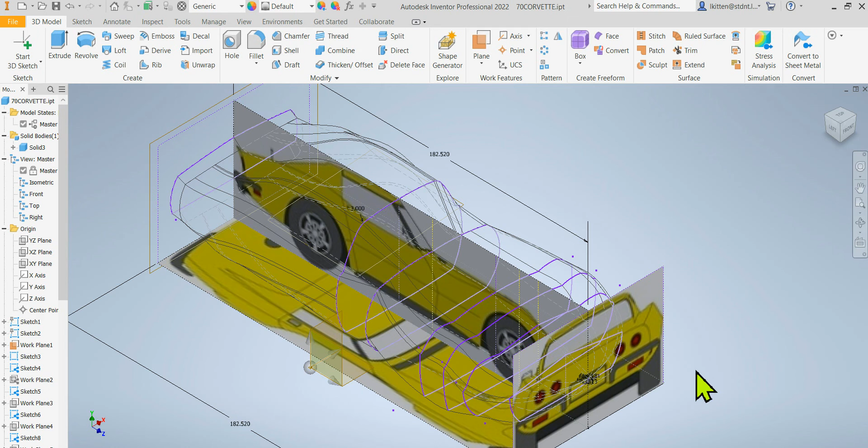All right, hopefully you're nearly finished designing your car. A couple things you probably noticed when you try to do your standard turning on it - it doesn't work very good because all these center points for the curves you add might be all over the place like mine are. It doesn't necessarily turn very well.

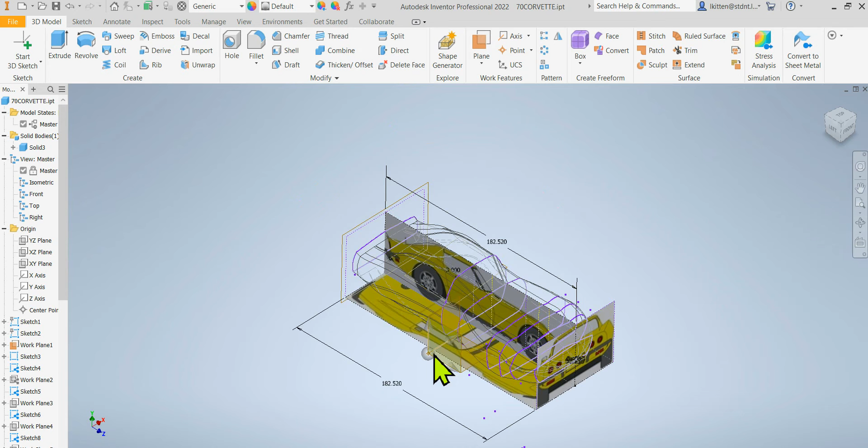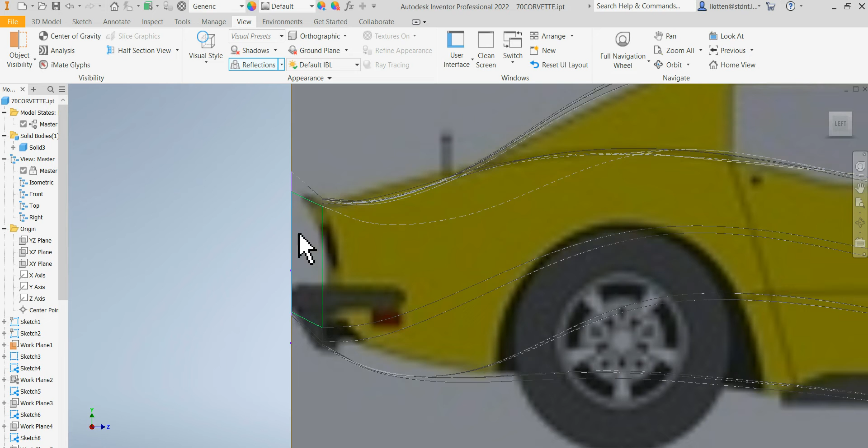I have mine in view with visual style wireframe with hidden edges right now just so I could see everything, and I turned all my sketches on. One thing I had to do a lot was go in and tweak the sketches so they more matched the shape of the vehicle, to get it to actually line up pretty well. I did have to add a few guidelines - some of them worked, some of them didn't, but some helped out, especially like mine for the top where this line is off the door to the back.

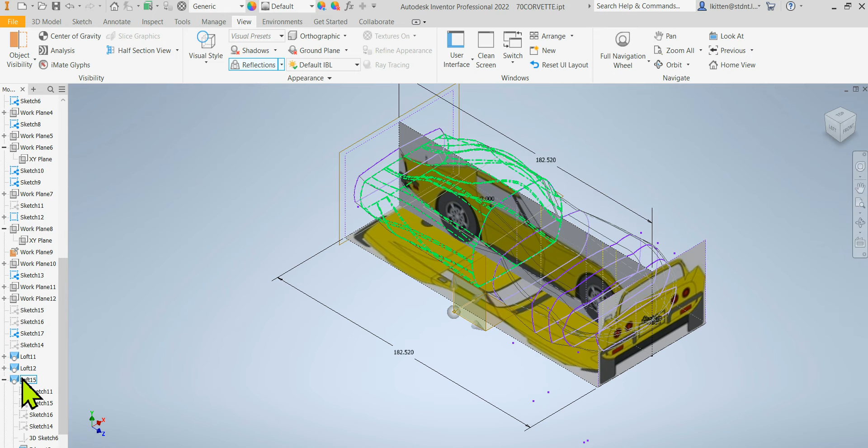So if you have to add some guidelines, it's not too bad to do. For instance, like Loft 15, I did all that. This one from the front to the back, I've got 4 lofts going on - to the windshield, the back, and then the air scoop on the back.

There's a 3D sketch right here that I had to add a guide to, because it was just making the lines go straight down instead of where I wanted them. So I added a 3D sketch right along that edge and just picked those points on my sketches as I went. Of course, you have to turn all those sketches on to be able to pick them, so make sure you make them all visible.

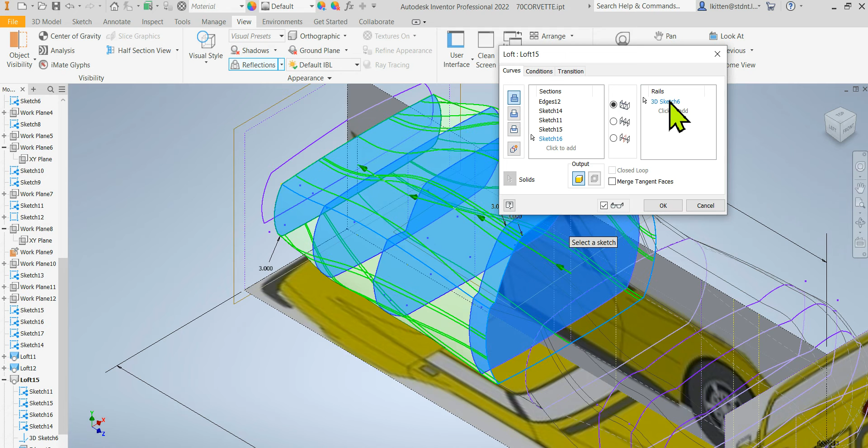When you add a 3D guide to it, I had to delete the loft and then add that into it, as you can see here. I showed you that a little bit last class too. There's a 3D sketch, the rail they call it in this item - that's that 3D line I gave.

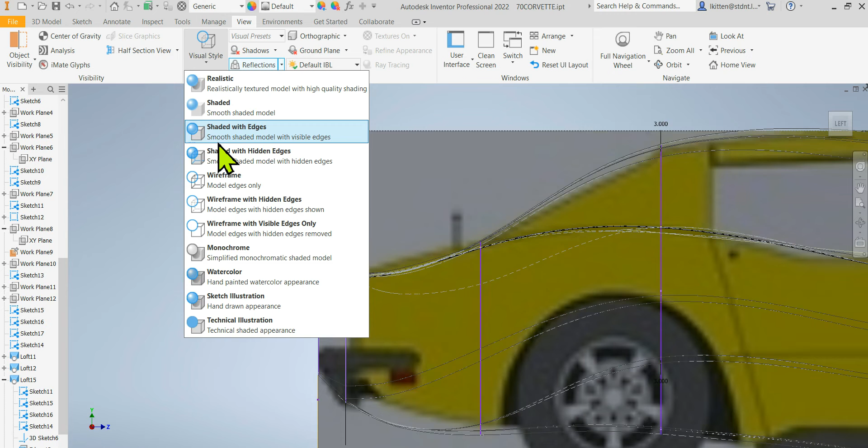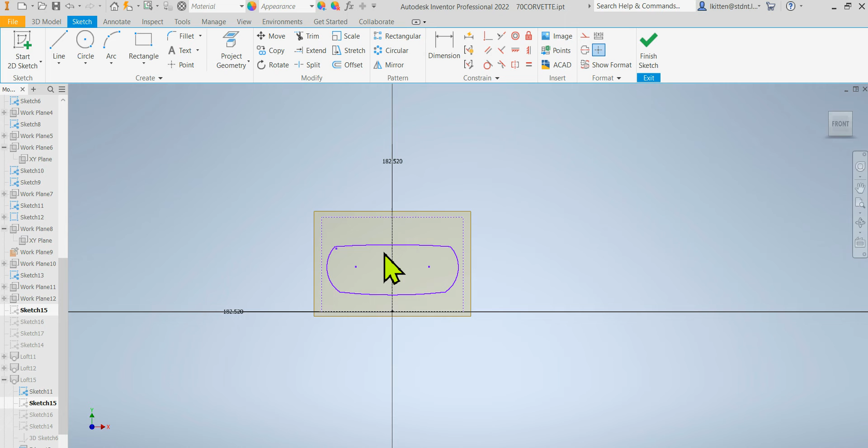Like, for instance, if I open this sketch and right-click and go slice graphics so I can see it - if you modify this half, of course you have to delete this half and re-mirror it. Also notice a lot of times my mirror line was off center, so I had to use a vertical constraint and constrain the bottom of the mirror line to the origin so it stayed in the middle. That helped out a lot too.

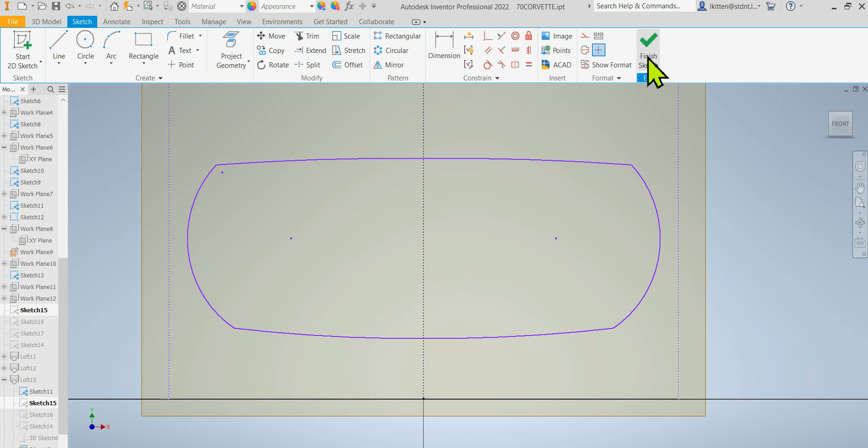But make sure when you're fixing your sketches, you fix the other side of the mirror too, so it works better. All right, so cutting into it - this part all needs cut out here. Now you kind of can't see it as well because that's why I was in hidden, so you could see the actual picture, but I wanted to show you what needs to be done here.

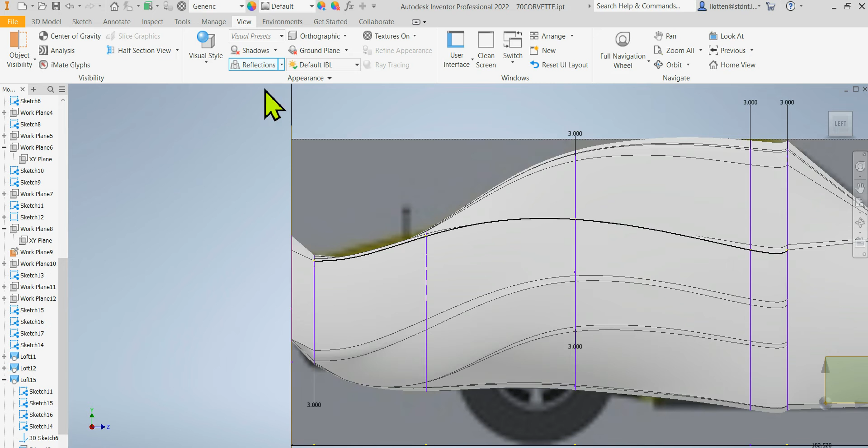So you don't have to match it exactly, but it's pretty close. To do that, it's pretty easy. I'm going to go back to wireframe with hidden edges. I'm going to try to follow this a little bit, but I don't want to make it that - notice my wing's bigger on the back side, actually I wanted it that way. So I'm going to draw a little shape right here and basically just cut that out for the bumper, maybe add some fillets to it at that time or later.

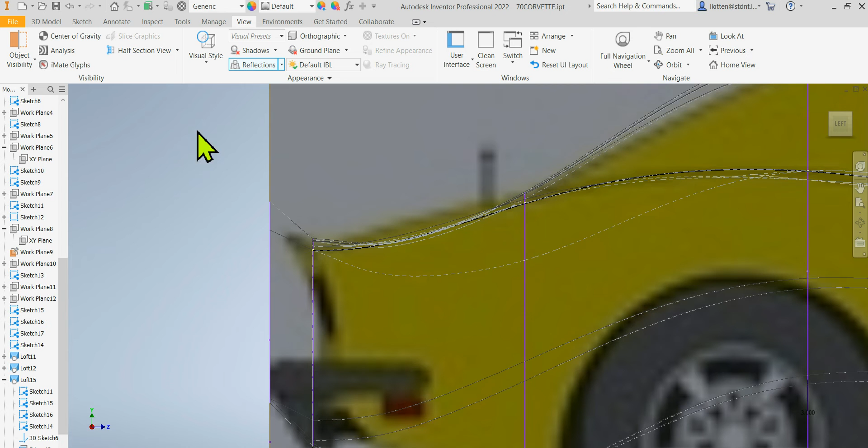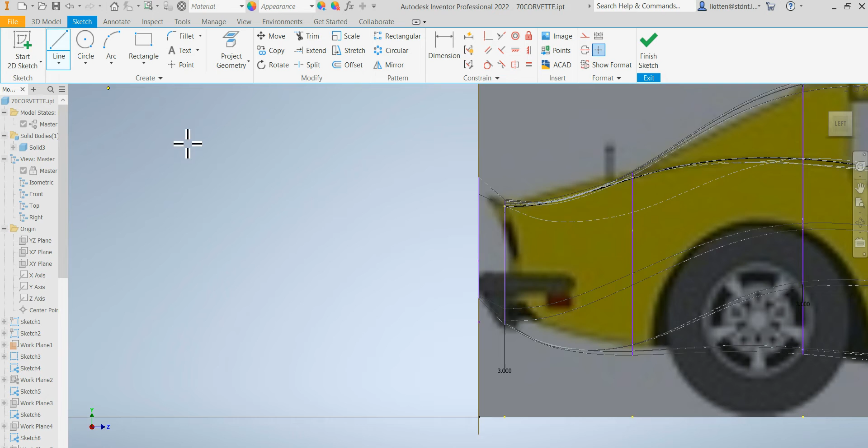So to do that, it's pretty easy. Just find that middle sketch, which after doing this so long, I know which one mine is - that one for sure is the middle one. I'll just cut both directions when I get to it. So right-click on that, new sketch, go back to it, and then just draw lines to cut it out. That's a little tricky to do, but I'll show you how. Basically, figure out how far you want to go in - I'm not going in as far as they did, I'm going that far, okay?

I don't want to draw that line that far because I want to put a radius right here. So I'm going to draw a line for a small bumper, maybe from here to here, and add a radius.

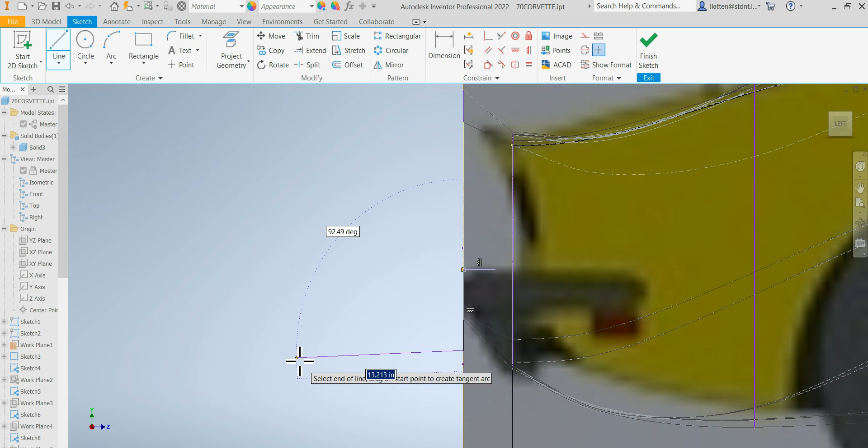Now I'm going to finish that line, add another one here. You can't really see it, but go down here. Now I'm just going to go way out here anywhere else, it doesn't matter because the part actually ends right in this area, so just make it bigger. It doesn't really matter how much bigger it is. Go down close to where I want to start cutting in. It's pretty sharp, so I'll go ahead and go down to there.

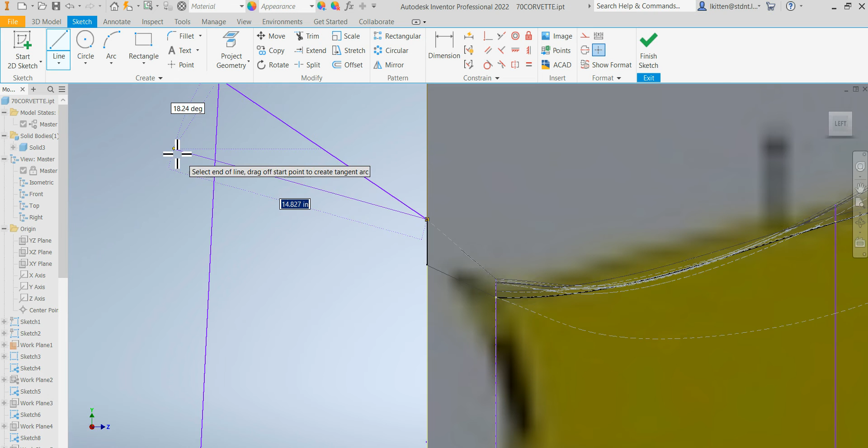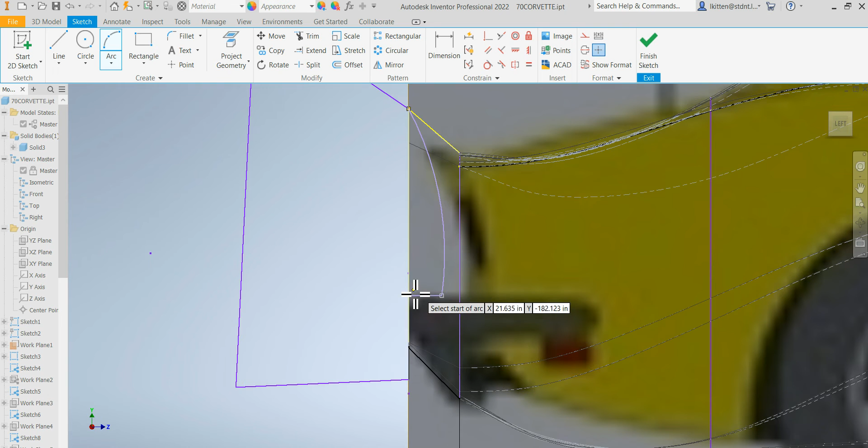This one I'm going to do with an arc, it's more realistic. And then just bend it in something like that, I guess. It's already cut along here. So I'm basically cutting out this crazy looking shape to get rid of what's in here, just to get rid of what's in there. And then be able to fillet this.

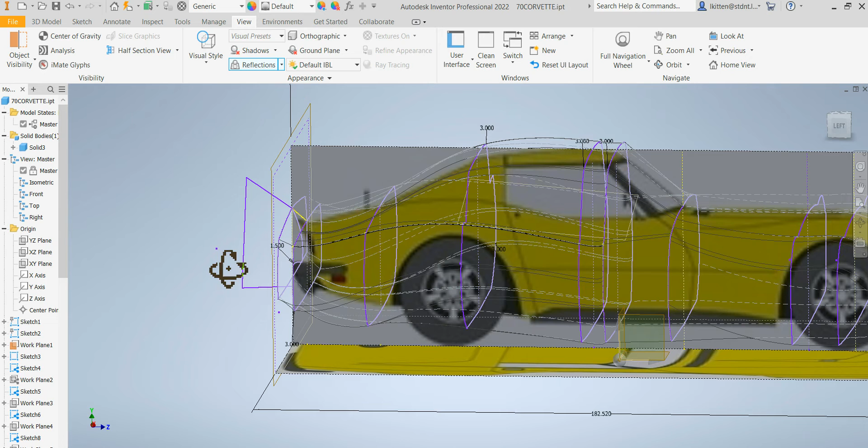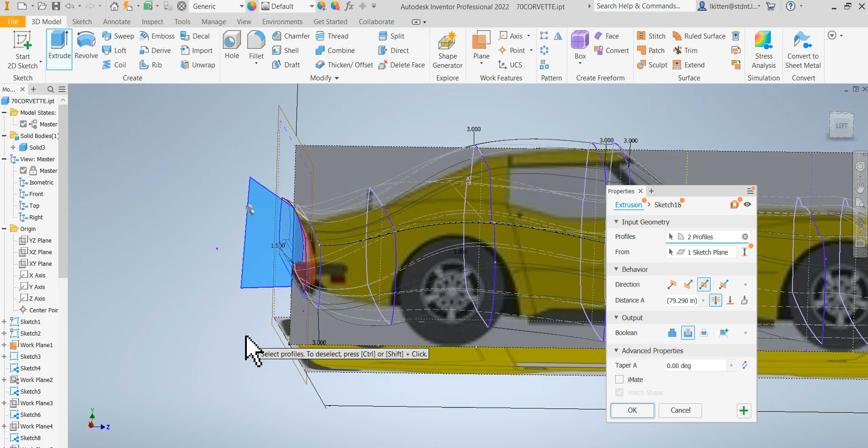I'm going to go to extrude, switch it to both directions, switch it to cut, and then through all. Now I got to pick my sketch, looks like I got to pick 2 of them. Okay, so I picked both those. I must have had a projected line in there somewhere. So it's cutting all the way through everything in both directions. And then we hit OK.

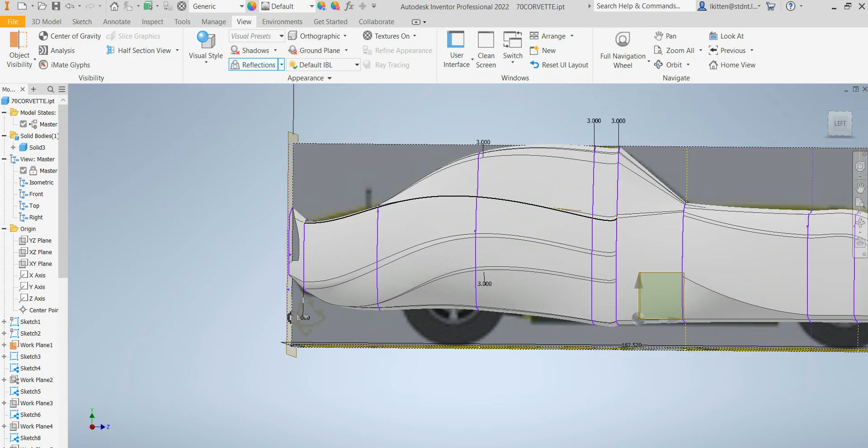Now let's see how that looks when I go back into the 3D. So that looks a lot better. You kind of got to ignore that middle picture there, but that's pretty good like that.

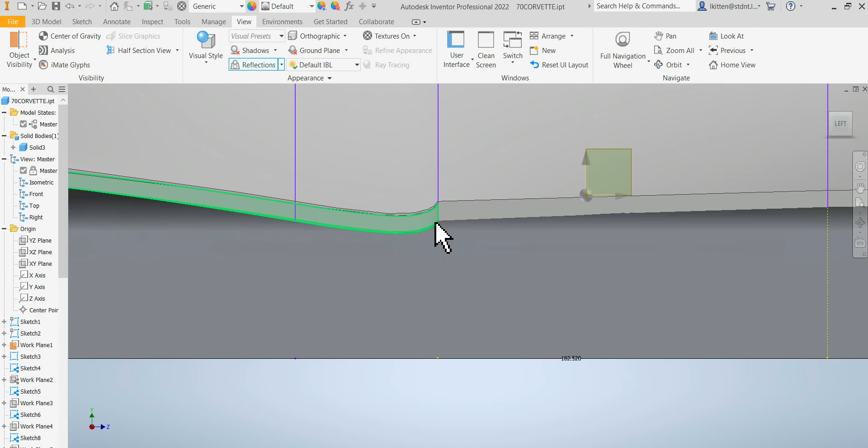So there's a lot of places that cut out, like mine, I've got a bump across the bottom of this thing. I would definitely cut that out and just get rid of that little bump. I could tweak my sketches forever too, but at some point you got to decide it's close enough. So since my windshield starts there, it needs to go up there. I'm just gonna run basically a block across the bottom of this and cut that out on that same plane.

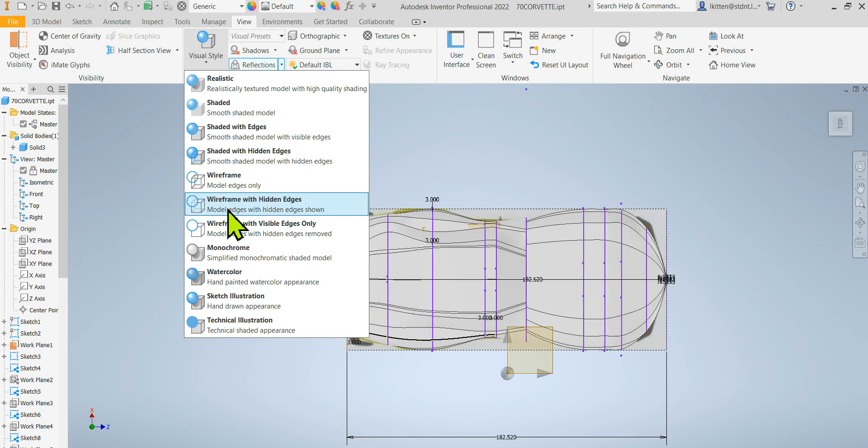A lot of times in the front, if you go to the top, you might have to do some tweaking on the bumper. The hood scoop's going in there. So, back to the hidden edges. On the front of this one, does it have a hood scoop? I don't even know if it does. That's the back, I think I got the front.

So this one has a big cutout basically in the window of the Corvette. If I pulled up a 3D, you could kind of see it better, but basically the back of this car is cut out. So if the front of your car is cut out, let me go back to sketch 1 and turn all these images back on so you can see them.

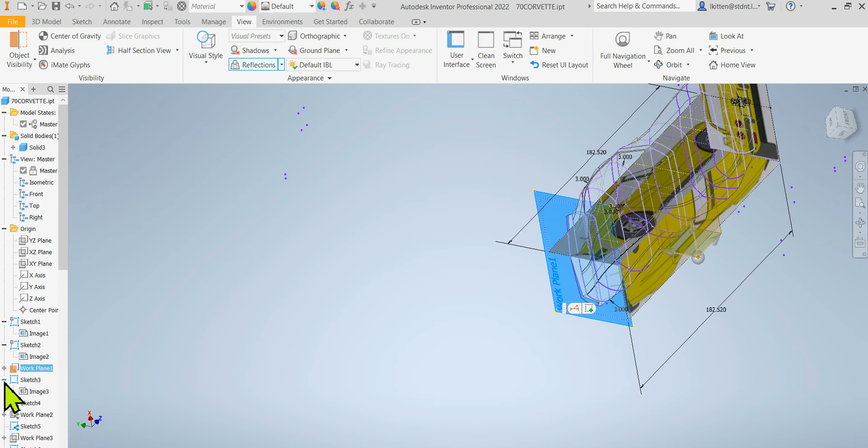So there is a hood. This is cut out in the front, so I want to do a little shape like that and cut it into the front bumper. You can do that same shape and cut it into the front bumper a few inches deep, so it'll look like that. Mine has a cutout into the back, it's got almost like the engine's in the back of this car, so it's got a cutout in that. So there's a lot of cutouts you can do.

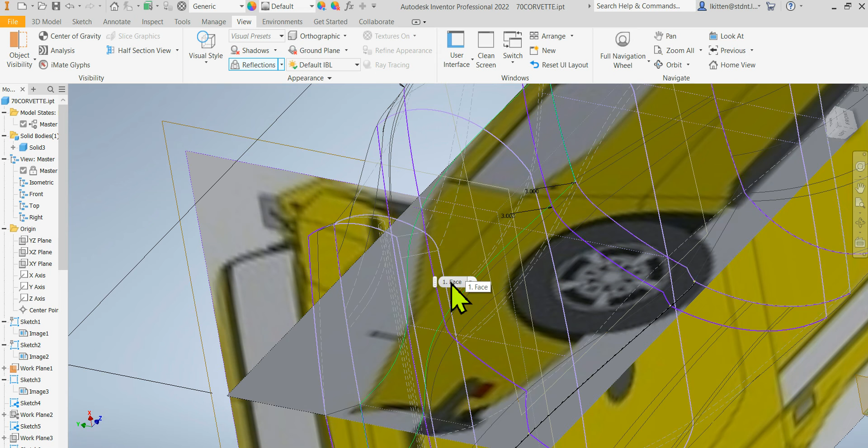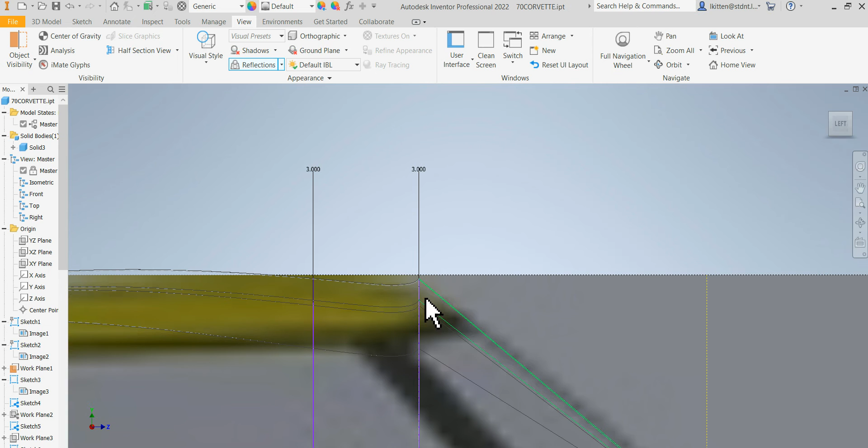Once you get those all done, you can start adding fillets. Anywhere the radius has too many edges and you're not happy with, start doing some fillets. I'm not doing every one of these, I'm just showing some examples. Like this one, right where this loft and the second loft started, there's a huge bump right up here, so I'm going to get rid of that with a fillet. Anywhere you have that, even right here, I'll try to put a small fillet on it. Add some fillets to your 3D shape, that's a lot easier to do with shaded with edges. But to add a fillet is pretty easy.

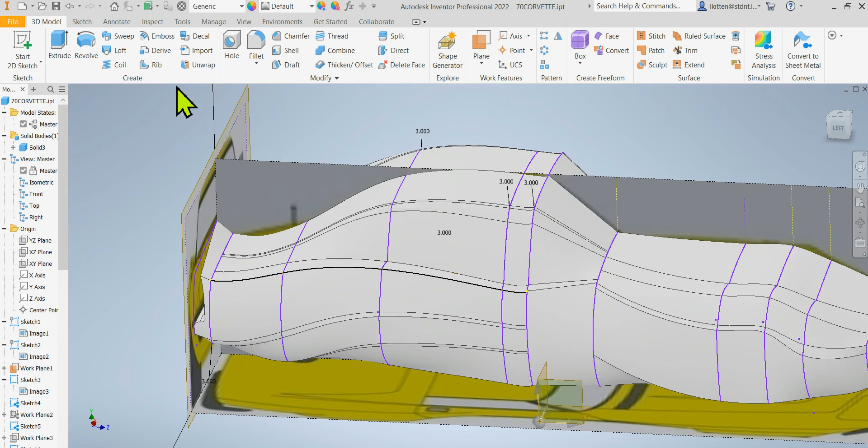Sometimes it won't do it, but you can try. So, 3D model and fillet, and usually you want that constant radius edge picked. I tested this before - it would only do 2.7. So I pick on there, and it does that. You can try to make it bigger by going to 2.8, and it fails. So the biggest it would do is 2.7. You just keep changing that number to get as large as you can, and that'll blend that a little bit around there since it was such a sharp edge.

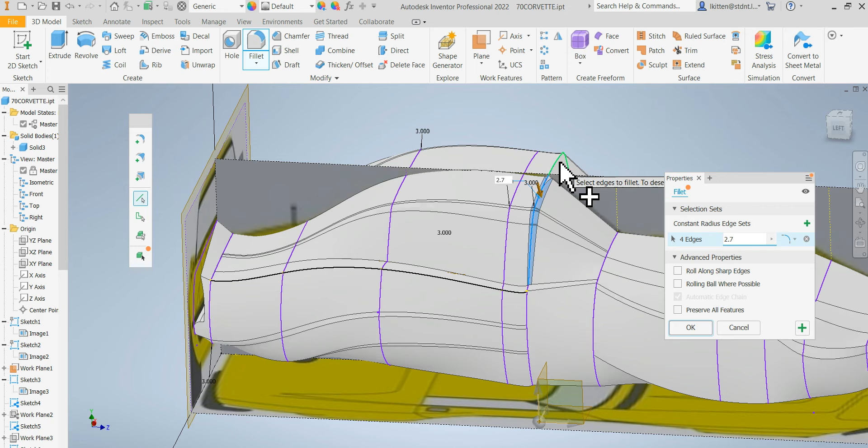I'm not really too worried about that half, because later I'm going to cut that whole half away and mirror this over. So if you look at your top, I'm just focusing on this half here, because this one's got some weird lines going on in the back end. So later on I'm going to draw a box in the front, cut this whole half away, and then mirror it across.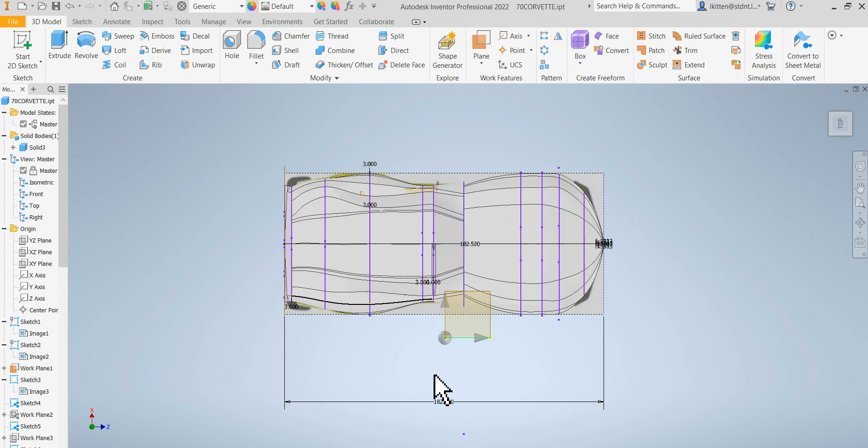Okay, so add the fillets to get that done. So you've got to do all your cutouts, including for your wheels. After you get all those cutouts done, if you want to move on to the next section, you can cut out for your wheels. To do that, it's pretty easy - you just follow the lines for the car on the wheels.

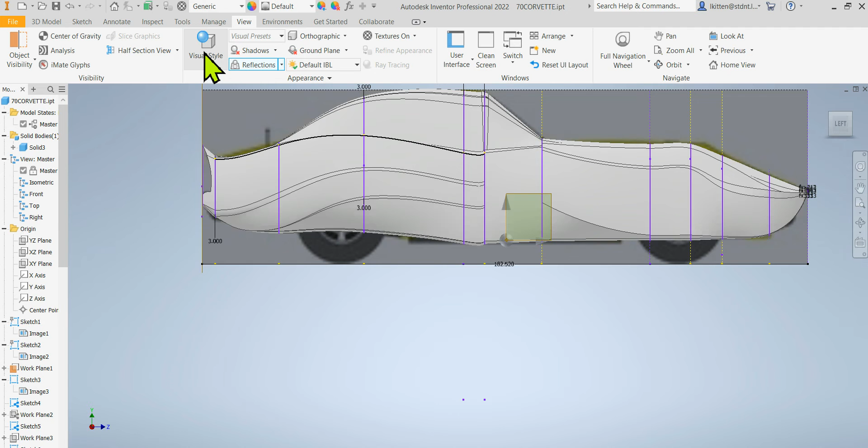So I go to View, which we really haven't talked about yet, wireframe with hidden edges. And you just follow this shape, and you do not cut it all the way through. Seems like every time I say that, I always see three students that cut it all the way through. So this one is not cut all the way through, it's cut to a certain depth. You need a plane on the front of this, and you need to cut it about the depth of the wheel, which I'll just do one for you to show you how.

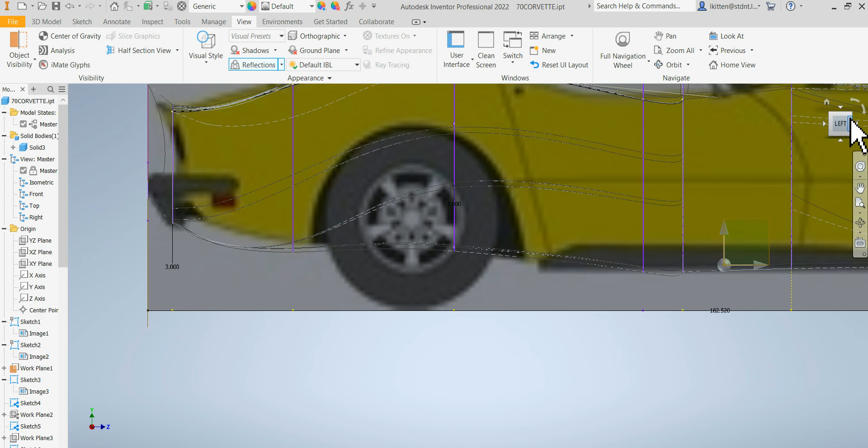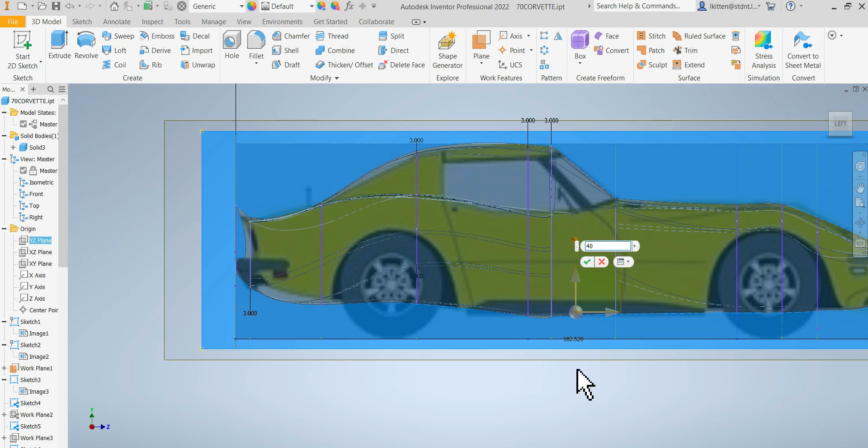All right, so I'm going to create a plane on the front of this thing. I know it's like 80 inches wide or something like that. So I'm going to go to that same plane, 3D model, offset from plane. You might want to watch me do this wheel one in case you haven't done it before, because everybody's going to have to do it. So I'm going to pick offset from plane, and find that center plane right there. I know this thing's like 80 inches wide, so I'm going to type in 40. Okay, but it looks like the arrow's coming out at me - you can turn it, double check that. No, it's not, so I'm going to make it negative 40 because I want to do it on this side.

All right, so now I've got that front plane right there. And on the front of this plane, I'm going to do a new sketch. This is kind of just like all the other cutouts - you're going to try to match this cutout of the wheel well. So that's basically just an arc or two. I'm going to do one... I'll do a couple I guess, because it is a couple.

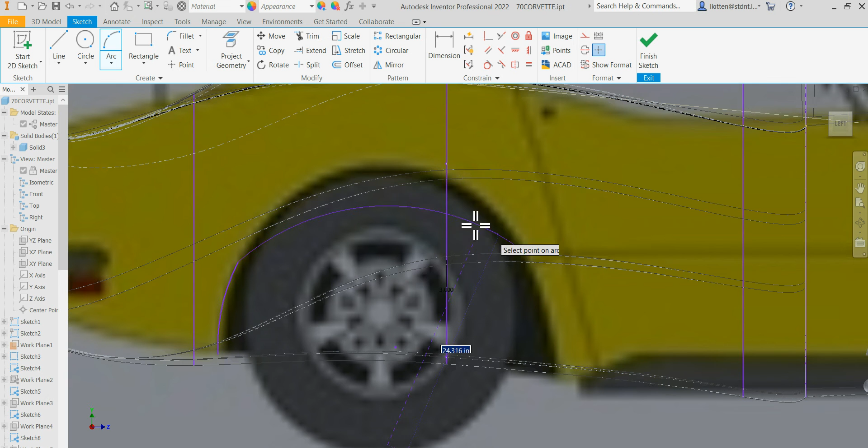I'm going to pick right there, and it looks like it's about the same radius to maybe right here. Then I'm going to hit enter and start again, and it's probably the same all the way to there on that one, or close. Yeah, see, it's matching up real nice right there. Not too bad anyway. You'll definitely want to make all these tangent when you're done, because you don't want any lines in there. So if it doesn't automatically go tangent like that one did, hit the tangent button to force them to be tangent.

That okay? Now it's a little bit bigger there, but I'm not too worried about it. My car goes all the way down to here, so you've got to finish making that a little bit bigger. So I'm just going to draw a line, try to stay tangent with that all the way down to here, and line it up with that one over to here. Now I've got a closed loop, so I can cut that out.

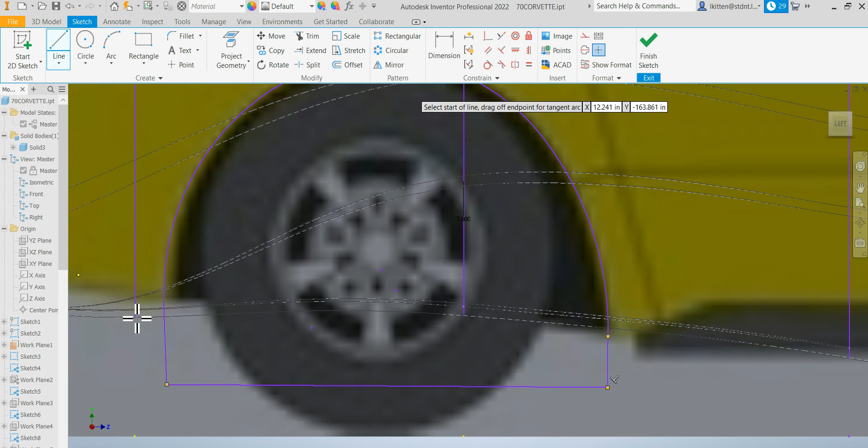Finish sketch, extrude, pick that surface, and it says it's not a closed loop.

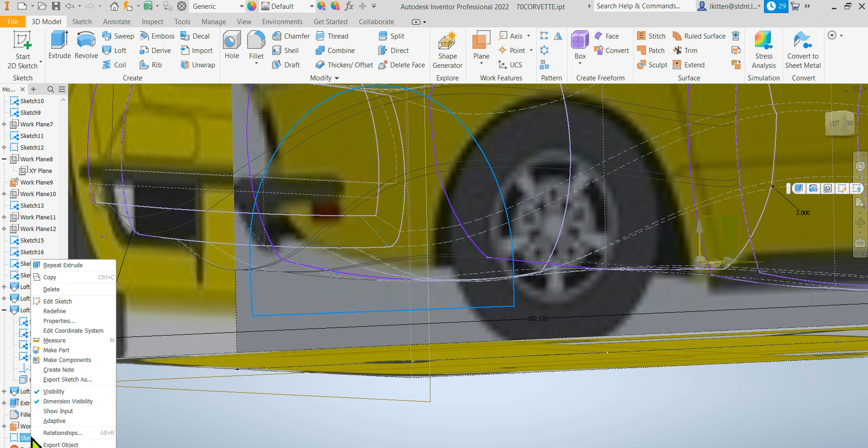All right, so that's a good chance to show you how to fix it when you get this, because that's going to happen to everybody in here probably. So I go down to that last sketch that I created that was not a closed loop - it didn't like it, so it wouldn't do it. I'm right-clicking on it, I'm going to edit it, and this is called Sketch Doctor, which we haven't done a whole lot with. So Sketch Doctor, diagnose the sketch - it's looking for all this stuff. The open loop's the main one I want to look for, but I might as well look for all of it. It says it's got an open loop - it's right there, you can see where I hit the button too fast. So hit next, next, close loop, finish.

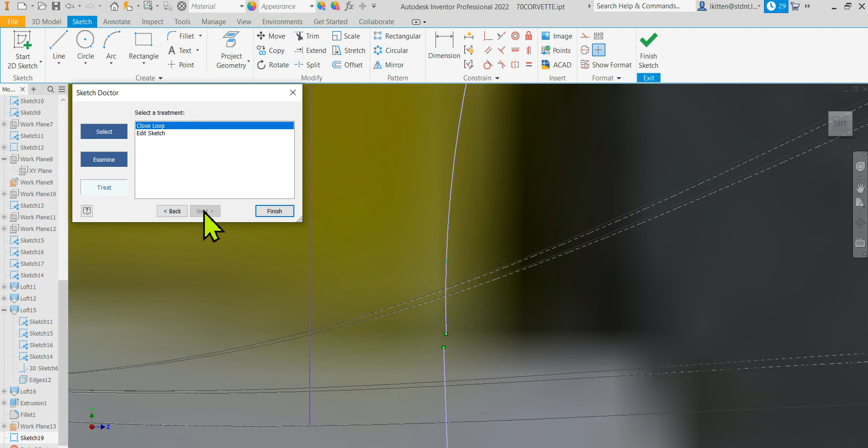Select the curve to start and finish the loop. Okay, well I'm in the sketch, I'm just going to fix it. So I go to coincident, pick this one, go to that one, and I matched up pretty good. Finish sketch, now it'll work.

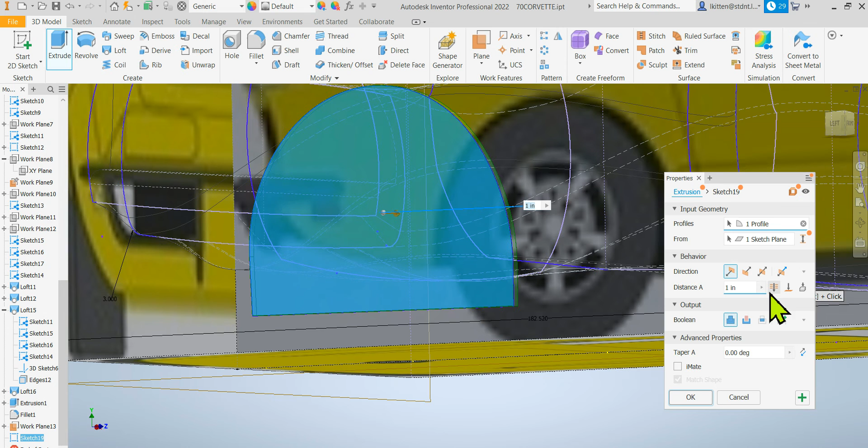Extrude, pick the surface I want to cut, switch it over to cut. Okay, and it's going the wrong direction, looks like. Yep, so switch directions. Okay, and now how deep you make it, that's the tricky part.

So I'm going to go to the side view of this and then try to drag that arrow, but it won't let me... until I'm past the wheel. So I just drag it. I had it for a second there. I had it again. I'm dragging that, now I keep getting in too big of a hurry. Okay, so I'm dragging that till it's to the wheel and maybe a little farther, right?

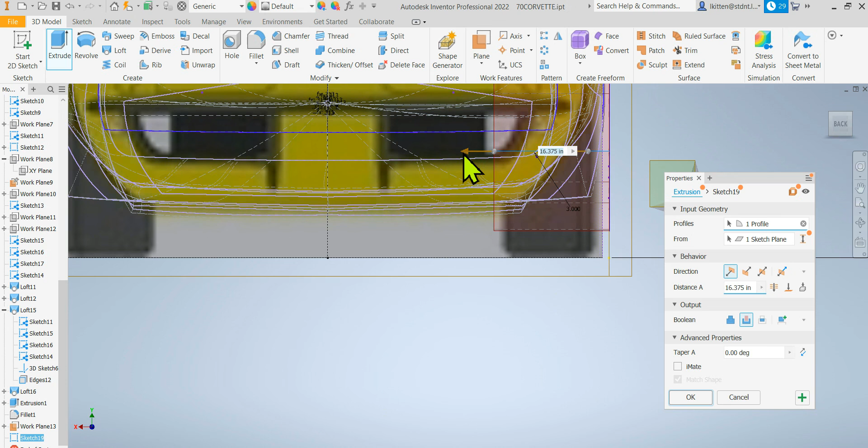So if I actually 3D print this, the wheels will really turn. So I'm going to go a little farther like that, maybe an inch past or something. And then just hit OK. All right, so that one's done.

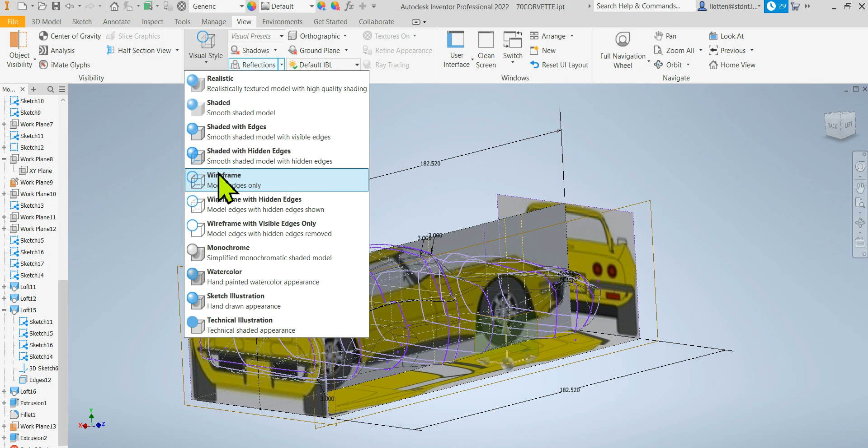Now, since I'm mirroring half my car to the other side, I'll only do one side. So the other wheel's done exactly the same way. Okay, and you can see it better in 3D again. View, visual style, shaded with. Okay, so there's the wheel well.

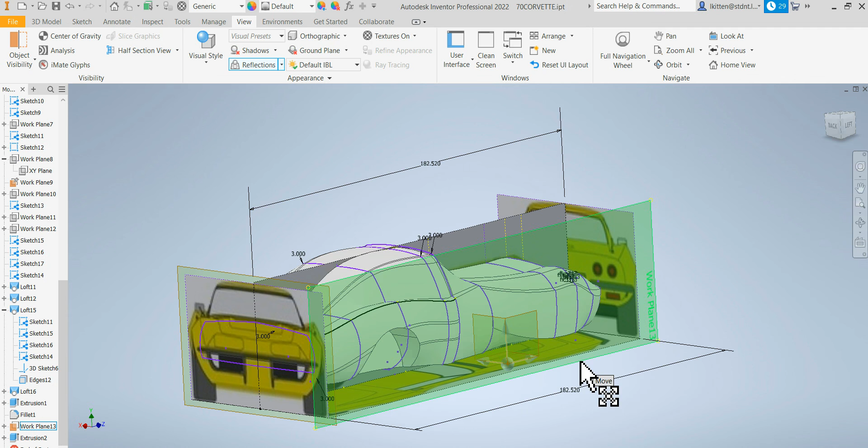When you get all your cutouts done, and don't do this till every cutout's done, you can't have any crazy shapes or it'll break on it. But once your filleting is all done and your cutouts are all in there, you can shell it. Now, do not cut the windows out till after you shell it, because that way it'll be empty in the middle like a vehicle is. It'll look a lot cooler, okay? So don't cut the windows out until after you shell it.

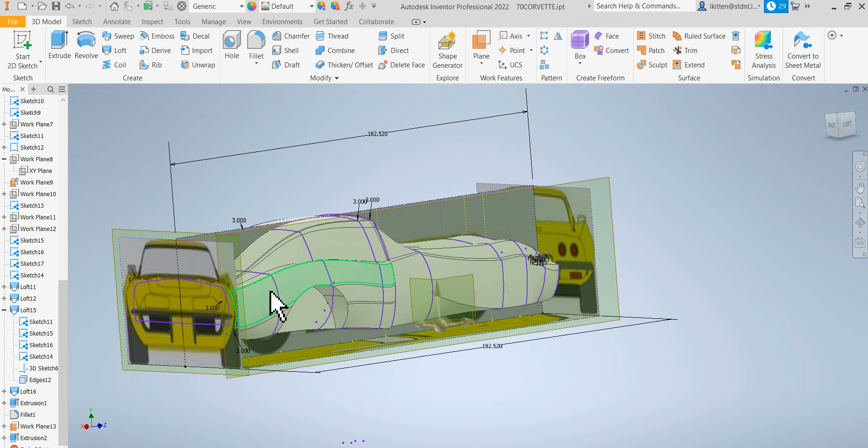All right, so to say I had all the wheel wells done, all my fillets done, and all my cutouts done, which I do not. Okay, but hopefully we'll have that next class. The shell's pretty easy, just don't pick anything to disappear. So when you go to shell, the more complicated your car is, the better chance it's going to have a failure and it can't figure out the math. Always save it before you do it, before you shell it, in case it completely locks up.

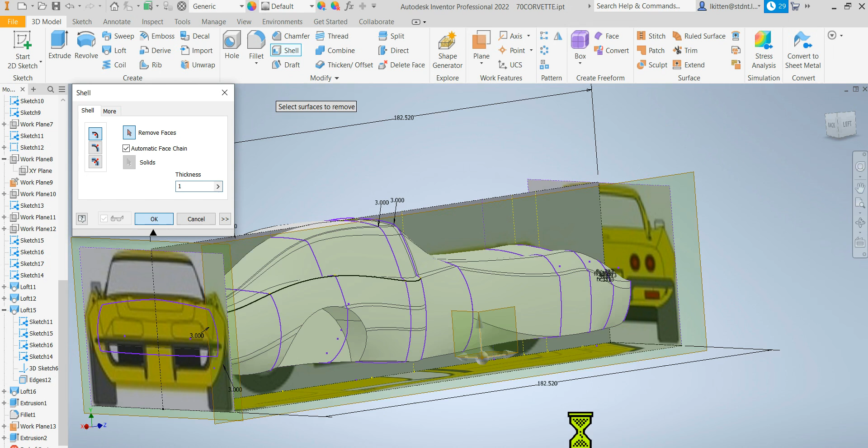Then you go to shell, and I would try to make it at least an inch or two thick. Sometimes that will not work, so I'm going to try one to start out with. And I'm not picking any faces because I want the thing to just be hollow. Okay, so I'm just going to pick OK. It might crank for a while, but it'll usually fail pretty quick if it's going to fail. So then your screen will turn black like that, and eventually it should come out of it.

I think that's enough for this video.

So when you get half of it all, before you do that, of course, if you're going to mirror half the car like I am, cut half the car away from the front, mirror it over the mid plane, and then shell it. Okay, so you'd want to mirror before you shell it too. Okay, if there's any places that are like goofy inside it, the shell will fail. I'll unpause this after it gets done.

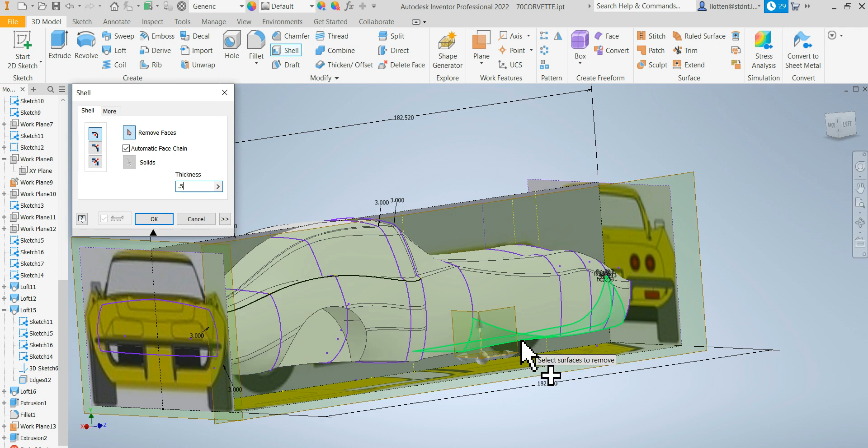So you just go to edit and make it thinner. I'm going to go to 0.5 because it looked like where it's going to fail would be places that get really skinny, so fillets help get rid of some of those problems. It might be failing on that fin where it's real tight up there. I'm going to try 0.5 now and see what happens. Okay, or where major changes happen real quick, where it fails too.

Okay, I did get a shell. My shell did have a failure and I can't get it out of it. So I'm going to continue to add fillets and clean this thing up and mirror it and see if it works later. Don't rush through it like I did. I kind of did that just so you can see the different things to do here. So take your time and add all the fillets, all the cutouts, front and back, and everything.